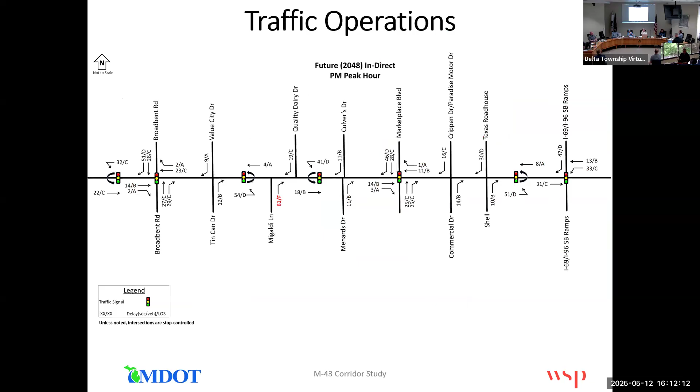Indirect, like an indirect, what does that mean? Indirect left and a J. Yeah, I'll show you here, I can pull up real quick, it'll help explain it and show it. It's a little tricky on the screen, as Peter mentioned earlier. Let's escape out of here and zoom in. Give me 1 sec.

So, Michigan left, yep, indirect left. Can you all see that pop? Is that, want to zoom in a little more on that? Yep, there we go. So commissioners, just remember you got the big screen behind you too. PowerPoint and these big long boards don't work well together.

Okay, so this is the Michigan left, indirect left, at Marketplace. If you're heading westbound on M43 and you want to make that left turn into Marketplace, with this indirect Michigan left option, you have to travel through the intersection, keep traveling westbound, and come to this first median crossover. At the median crossover, you make your left through the median crossover, come back eastbound to the intersection, and now you make your right turn onto Marketplace Boulevard - your indirect left. So no direct left turns would be allowed at the intersection.

You'll see a lot of these obviously in the Detroit area, Grand Rapids has quite a few of them. So you just have to go past the intersection, use the crossovers to come back to make that right turn into wherever you're heading. So Jason, while you have that drawing up, I assumed that description was going to be the J turn - what's the J turn?

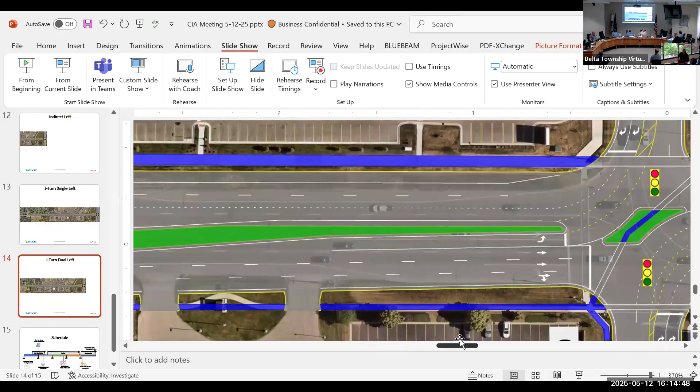Yeah, oh okay, so at the curve, the intersection is just two opposite J's. And it's two turning lanes? Well, going this left option he's showing you right now. Okay. Yeah, and we'll get in, we'll walk through the traffic operations, we'll show you why that needs to be that dual left turn lane.

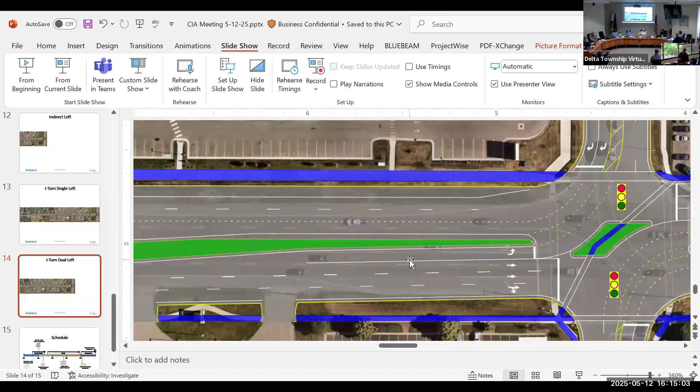And we talked about that 2A alternative and 2B alternative - that's the difference. The difference here is that Marketplace's original ops template had it shown as a single left turn lane. Then when we looked into the new development and new traffic projections, and then when we looked at that Saturday, we saw that if you keep this as a single left turn lane, you're going to have some significant delays and queues. During that Saturday peak, it's going to be difficult to get onto Marketplace with a single left turn.

And that's kind of, we went back and forth with the modeling and looking at all the queues and delays and all that. And that's why we came up with this alternative 2B, the dual left at Marketplace.

I understand, why is that? Basically you've added a median in the middle of the intersection, correct? That separates the opposite direction J-turns. How does that improve safety or flow versus just direct left turns?

So in this situation, correct me if I'm wrong, we eliminate some of the phasing at the traffic signal. You're getting rid of that through movement now too at Marketplace. They're all making that right hand turn now, so you don't need green time for the through movement. For a full access intersection, you have to have green time for your left turns, your through movements, and for each of the 4 legs. Under this situation, we eliminate that green time for the through movement.

So now that heavy westbound left has more time to clear all the traffic out through that. That gives more time for each leg of the pedestrian phase. With this indirect turn, especially at these intersections, pedestrians are using the intersection like it's a 4-way.

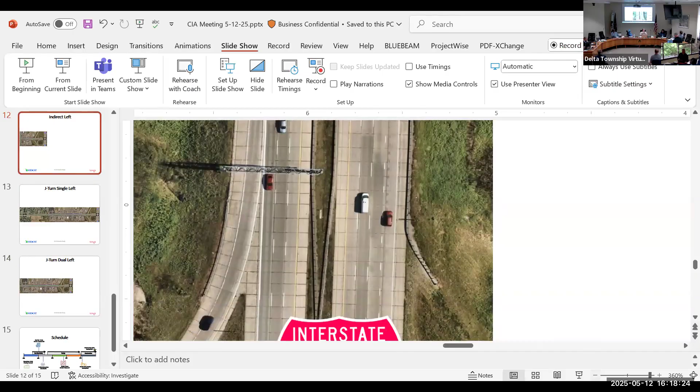I have a question about the indirect left. Because you're going past Marketplace and then you're coming around doing that sort of Michigan turn. But is there anything to stop the traffic from turning right before Marketplace? There was a side street there.

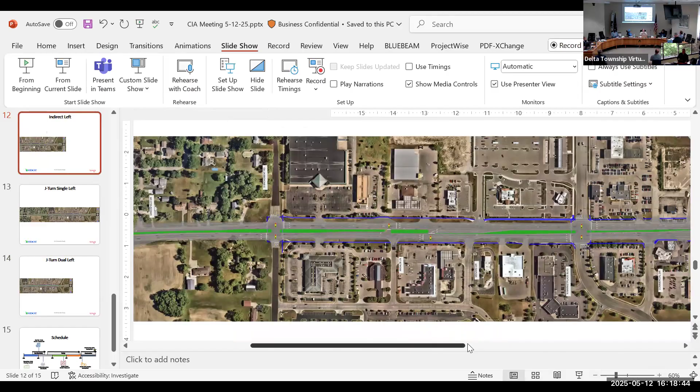They could turn there. Okay, so does that present any challenges by turning right - a lot of traffic turning onto that street before Marketplace? Yeah, I'm about to- Commercial Drive is the other one. You can turn right there too. Yeah, it looks like you can, but are there going to be any traffic buildups or jams as you get around in there into the main hub of that plaza?

Or will it, because that's on the private side. Right, yes. So as part of this modeling, we only looked at the traffic on 43. So as part of that, what you'll see is when we ran the modeling, when you're leaving this area eastbound, a lot of that traffic is heading to the ramps. You'll see this lane will get a lot of traffic in it because a lot of folks are coming out of the development heading eastbound to the ramps, and they're getting in this right turn lane because a lot of folks are coming this way down the ramps.

So I know the intention is you're making this Michigan turn and you're going to go to Marketplace, but it's like, why would I go all the way back to Marketplace when I could turn right 2 streets before? Yeah, and you'll see that.

And that's okay. We actually alleviate some of that - what you'll see is, obviously a lot of local traffic, eventually down the road, whatever, 5 years, maybe you'll see a little more balancing with the internal drives like you're talking about. So the local traffic will know, I can make it right here, I don't have to go to Marketplace. You will see some internal balancing, and again, local folks will go this way instead to avoid the traffic. You'll see some of that.

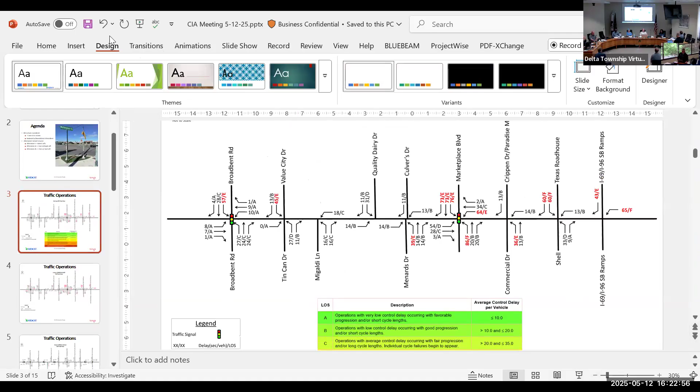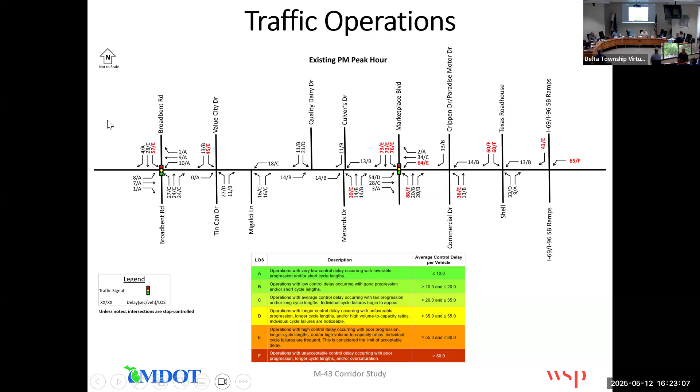All right, let me share this here. This is where I get confused. All right, can everyone see that? You want me to zoom in a little bit? Sounds like they need it zoomed in - zoom in a little bit on that. I'll have to go back to a copy here in front of me that may help. Oh, you can read it better back here.

Okay, so we just want to go over this real quick - kind of how we got to these traffic operations. As part of this study, we looked at the existing traffic conditions - that's the model we're showing here. We looked at the no-build conditions, which brings all this future traffic onto the existing network - what's going to happen to these existing intersections? That analysis helps us determine the future alternatives, where we need an additional right turn lane, two through lanes, whatever that may be. That helps us figure out the geometry.

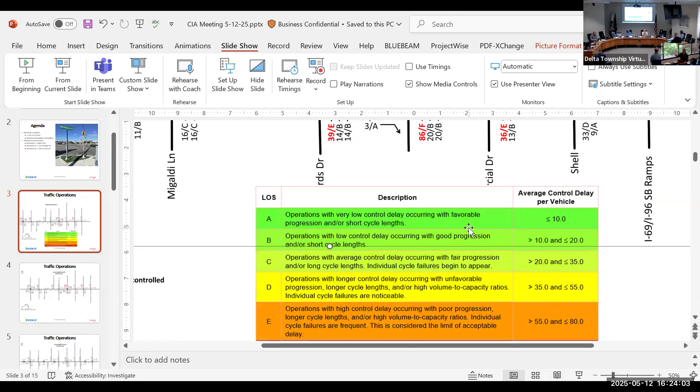I'll keep it at a higher level here - we can, if you want to ask questions, feel free, but really the focus is obviously the marketplace, that's where a lot of our traffic's going. So again, you can see here, this is the existing conditions - with today's traffic, this is what the traffic operations are. I know sometimes it gets a little confusing about these operations, so we have a little figure here showing the description of what this level of service E means.

As you can see here, anytime it's level of service E, we show it in red. It's long delays and long queues, you may have to sit through 2 signals sometimes. We don't want to see E's and F's typically.

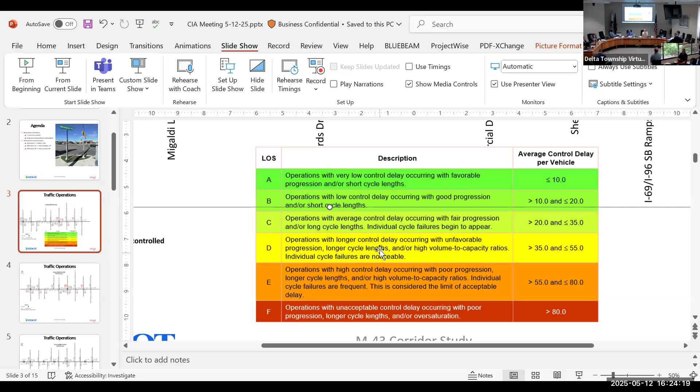So when we look at the existing conditions out here, we see that the westbound left is operating level of service E, with significant delays and long queues. And the southbound movement out of Marketplace is operating level of service E, with even longer delays and longer queues. I've been out here a few Saturdays where I've sat through 3 lights sometimes southbound at Marketplace.

So what we found, we've all tried this as well, we live in the area, is that this existing conditions model probably does a pretty good job actually predicting what's happening out there today. So we trust the model, believe in it, it shows real world experience. Yeah, here's what we're experiencing when we're out here. Does anybody have any questions on the existing conditions model?

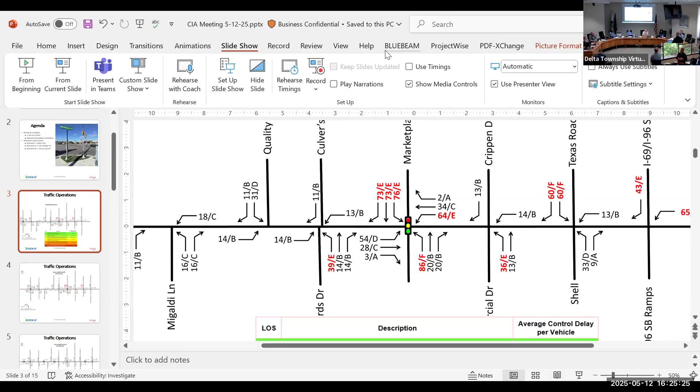So what we found is when we're looking at the overall traffic, typically for any MDOT project, any local agency project, you design for your AM and PM weekday peak hour. So that's the approach we took first. The PM weekday peak hour was the controlling peak hour in this situation, there was more traffic entering during the PM peak than there was the AM. So we took that scenario and used that for the basis of our modeling to see what's going on in the project area. Then when we talk about it a little later, the next step was to look at those Saturday conditions, and we'll show those 2 in a sec.

Based on that, now this is the no-build scenario, 2048. So these are our 20-year traffic projections. It shows 20 years of growth, but it also included all the proposed developments, the Bass Pro, the senior citizen home, the medical center to the west. So it included all those developments. We throw all this new traffic onto the existing road network, and we press play on the model and see what happens.

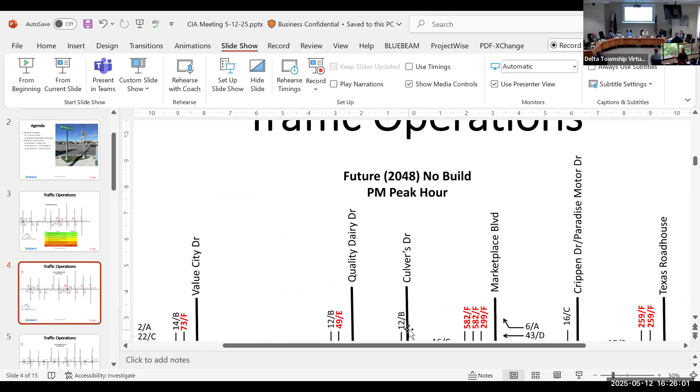So based on that, obviously, we all know what's going to happen, right? We add all this new traffic, we don't make any road improvements. And this optimizes the signal timing, so we can play with future signal timing to make some things work, some things not work. But what you can really see here is that southbound Marketplace gets significantly worse, 582 seconds of delay. So you're sitting there for 5-6 cycles. It's a long delay, long queues. You're able to keep the westbound left turn relatively reasonable, level of service E still.

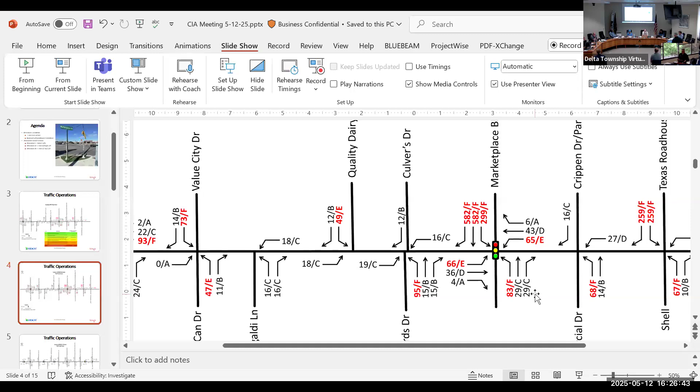You can, again, tweak the signal timings, allowing that westbound left more green time. And then what you'll see here now, though, is that the eastbound left turn on Marketplace fails, poor E level of service. And then the northbound left also goes to level of service F, which is to be expected. You're adding this traffic, everything fails in this situation.

So the next part of the study was, well, what do we need to do to improve these traffic operations to provide acceptable levels of service? So that was where we came up with the alternatives. Alternative 1, the indirect lefts. Alternative 2, the J turns.

So when we model those new alternatives onto the road network, what do you have here? This is the indirect alternative. So you can see at Marketplace by adding this new alternative, what we're doing here is we're taking out the left turns out of the intersection. So now there's no green time needed for left turns, so we can provide more green time to the through movement and the westbound movement. Because now the left turn's got to go through the intersection and come back in that indirect Michigan left. You can see under that scenario, this indirect alternative provides some pretty good traffic operations all around.

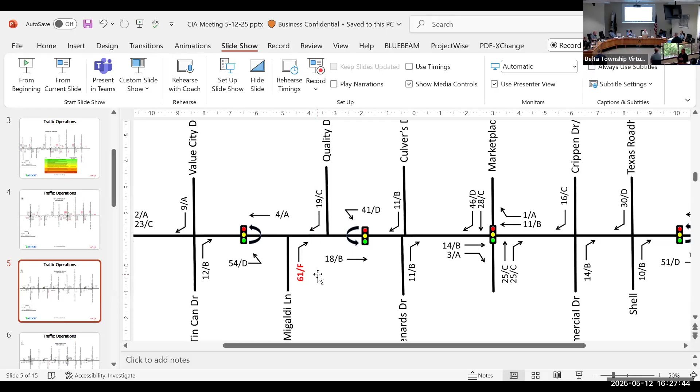We've only got one level of service D for the Marketplace southbound right. So we ran that alternative, it works great, provides acceptable level of service. It provides pedestrian refuge. So those are the kind of benefits of that alternative.

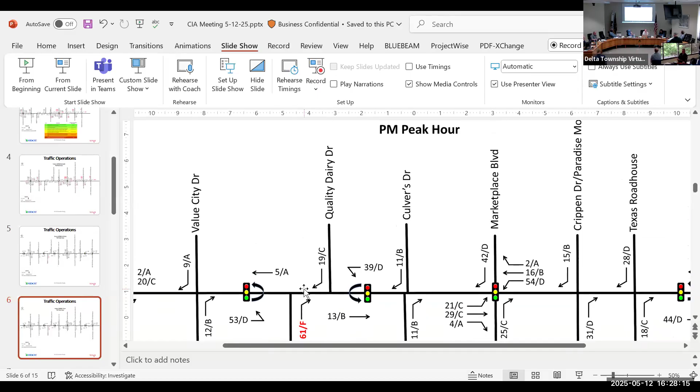So the next step was to look at the J-turn alternative. This is what we'll talk about a little, the single lane and the dual lane. So when we take a look at the same traffic volumes, the 2048 future volumes, and we lay down the J-turn alternative - we showed earlier that this allows direct lefts, westbound and eastbound, but there's no north and south through movement. You can see here the J-turn also provides pretty good levels of service, acceptable traffic volumes, minimal delays, minimal queues.

In your survey or when you prepared these projections, did you include additional businesses, or housing? So anything that was on an approved plan was included. We can't predict housing in some situations - we don't know everything that's going to happen.

At some point, what you'll find is we have these 20-year projections and a lot of times we'll include this wide net of everything. And in 10 years, the economy changes, things change, and then we don't reach those. So we really only typically take what's planned for, what's accounted for.

So what they have is each, like Bass Pro, developed a traffic impact study that goes to the township, that goes to MDOT for review. They approve those traffic volumes, and we plug those into our model.

I'll ask this of Peter - isn't housing proposed in the development already? Yeah, one of the phases. I worked with the Delta Crossings team to update their traffic study that encompasses everything they are aware of now - that could be subject to change, but it was kind of max build out. So that's the information the consultant team is working off of. Everything the township has in the books now, or that we're aware of that's planned, has been incorporated.

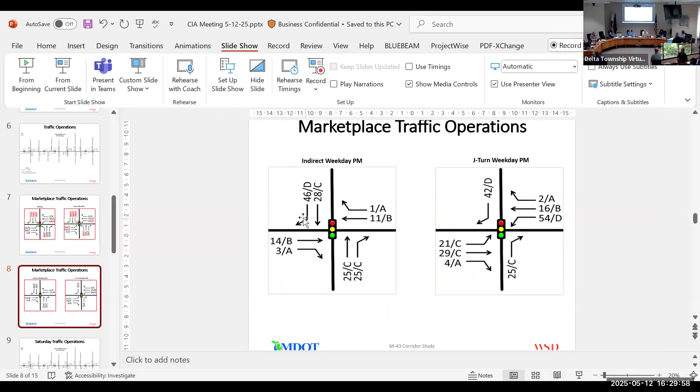Here's just a quick comparison of the alternatives during the PM peak. Again, it just shows that they both work well at Marketplace - they're both providing acceptable level of service.

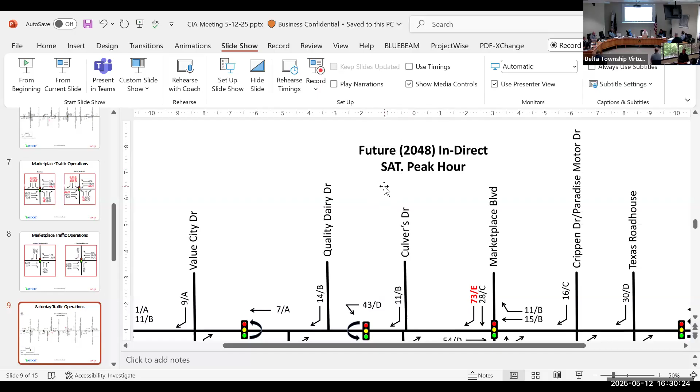What we found is Saturday volumes vary - they're different than our weekday PM peak. Obviously you get more folks coming in and out to drive through the corridor, eat at the restaurants, go shopping. So when we ran the Saturday peak hours, 2048 future volumes, this is the Michigan left alternative.

What's really critical in this one is this crossover here - it fails during the Saturday peak. You see that through movement at the crossovers, 79 seconds delay, level of service E. So again, long delays and queuing, sitting there for a couple of 2 or 3 cycle lengths.

So then we also ran the J turn option under the Saturday conditions, and you can see here, this is the single left turn. Under that J turn alternative, the single left at Marketplace, you can see that westbound left fails during the Saturday peak, the southbound movement fails, and also that eastbound through movement fails.

So when we ran those 2 scenarios, we said, look, maybe we have to look at some different lane configurations. That's where we took a look at the dual left turn lane under the J turn option. You can see now, by having this dual left, we can spread the green time around the whole intersection, so now the eastbound movement provides excellent level of service.

You got C's, B's, and A's. This westbound left now operates at a level of service D instead of that E. So by adding that second dual left, it significantly increased the capacity, accommodated more traffic volumes at Marketplace. Instead of 3 throughs and a single left, now it would be 2 throughs and a double left - so you're not adding crossing pavement for pedestrians, you're just changing the usage of one lane from a through to a left.

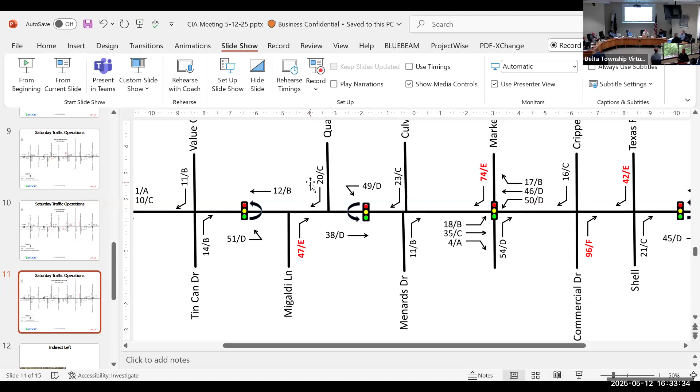Obviously the main benefit of the boulevards is, if you recall, the purpose and need statement from last month: improve safety on the corridor. That's not only pedestrian safety but also vehicle safety. Currently there's a lot of direct lefts in and out of driveways, and that's where a lot of these crashes occur. So you put the boulevard in, you eliminate the direct or the left turns, and you reduce those crashes significantly.

With the proposed changes, are we keeping the same level of speed for the vehicles? Yes, it'll be the same.

This is an MDOT gold route, so the lane width has to accommodate semi vehicles. The lane width has to stay at 12 feet—correct me if I'm wrong. It's going to stay at 11 feet, sorry. And the speed limit will stay posted as is, correct?

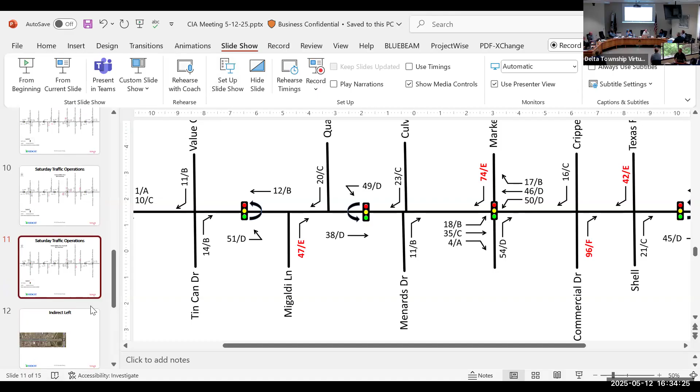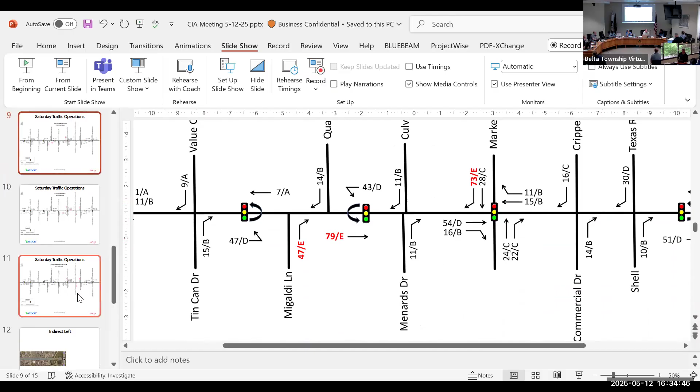Sorry for being anal, but I'm just trying to make sure I understand this correctly. On the three options here, future 2048, indirect, Saturday hours—just to pick arbitrarily, Commercial Drive—looks like you'd expect a 14-second wait, or B rating, to turn right out of there towards the highway, right? Correct. But when we add the J-turn, that time actually goes up—it increases to 34 seconds. And when we add the double lanes, it goes up now to an F, future, to 96. I'm just trying to understand how those positive changes negatively affect the results.

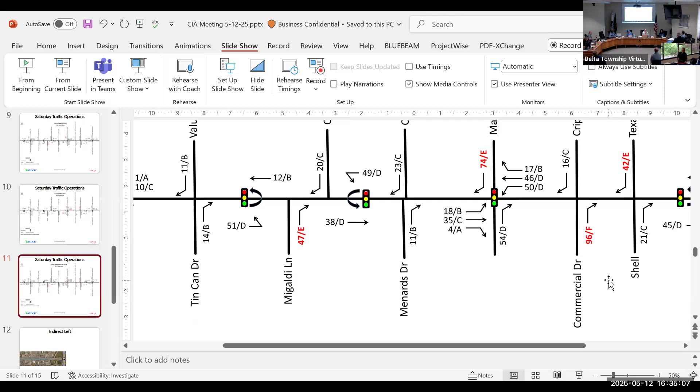Yeah, I'd have to look at the modeling more. I'm guessing what's probably going on is since this is an unsignalized drive—Aaron, you can help me out if you have thoughts too—you're probably putting a lot more through traffic in front of that driveway. What's happening is we've got to accommodate that left turn heading southbound. So if you only have one lane, you have to give more time to that left. The same operation that happens right now is you have a protected left, and you can also make that northbound right turn movement. When you go to two lanes, it's more efficient to move the lefts, so you actually have less of a window if you're on Commercial Drive to turn north, where you kind of have that protected left shielding you from the eastbound traffic.

So that's kind of why it gets a little bit harder—it's just because there's more green time on Saginaw, so you have a little bit less of a window to make that right. That being said, we've talked about traffic balancing, and I would think that more people would move over to Marketplace if you don't have that protected movement.

Okay, thank you. Yeah, so you can see all these, they all have trade-offs, they all have impacts—it's like we talked about the purpose and need. We do one thing, it doesn't necessarily address this part of the purpose and need, but it moves more traffic. So there's a lot of trade-offs, a lot of back and forth on these alternatives, and it's a bit of a challenge. There's a lot of traffic in this corridor, that's for sure.

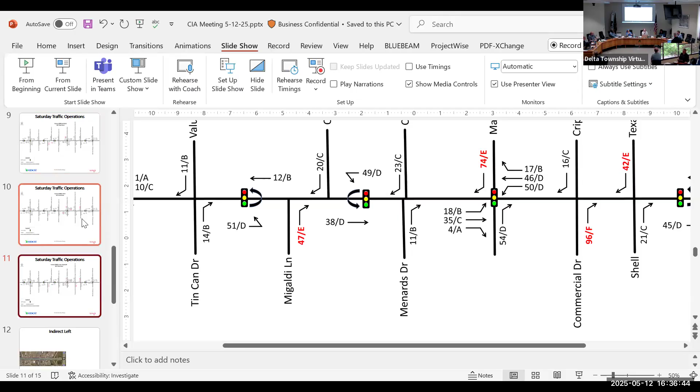I can walk through the alternatives real quick. You guys want to walk through them up here? You want to go in the back? Is there one more question?

I was just wondering about the medians, what you're calling medians—is that raised, or what is it? Yep, so those would be raised medians, something you would see. Where's our closest raised median out here? By the mall, maybe—yeah, by the mall, a short one there. So yeah, like 5, 8 inches or lower, those are 6 inch, 4 inch curbs—or 4 to 6 inch curbs, so there'll be a curb this way. How wide?

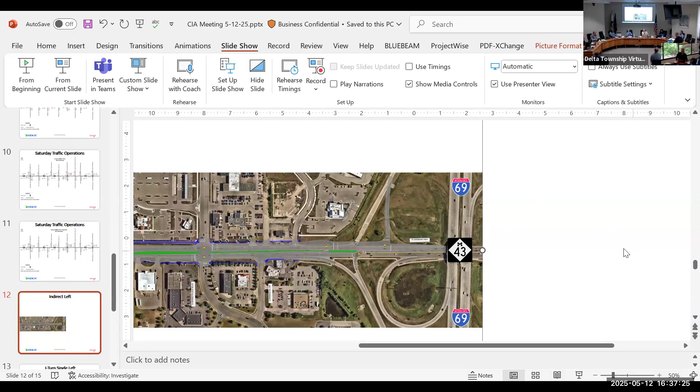Depends on the alternative, but I think it narrows up to 3 foot. That's where you got the dual left. But through here, you're about 20 foot.

And then the J-turn median strip, how wide would that be? Again, that depends on the alternative for the dual left. About 24 foot, I would say, north and south, and about 16 foot wide.

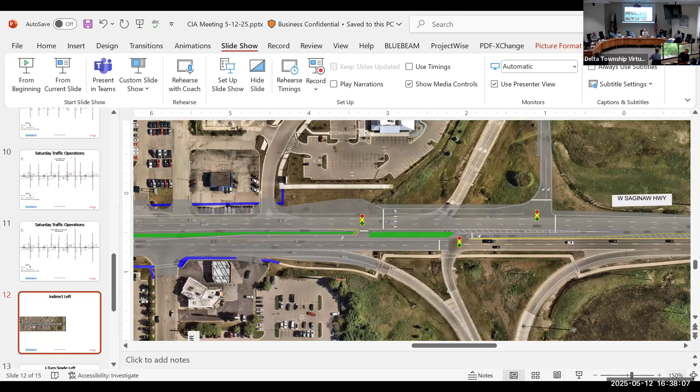The median is shown as green in these, that doesn't mean it's all going to be grass. We haven't discussed what it's actually going to be in detail. It would be really hard to get a mower in there in a lot of the spots. We might have to turn them all into rain gardens to deal with the stormwater runoff in this area, so who knows. But that detail doesn't necessarily affect the design choice between the J-turn and the medians, whether it's one of these indirects or the J-turn.

One thing you'll notice on these alternatives are these little bump-outs, called loons. To accommodate a semi truck with these narrow medians, the semi will come through and make its crossover movement, and it will need to use this bump-out traffic loon to make that U-turn movement. That's why you'll see that bump-out there. We have a couple other bump-outs too, we'll point those out as well.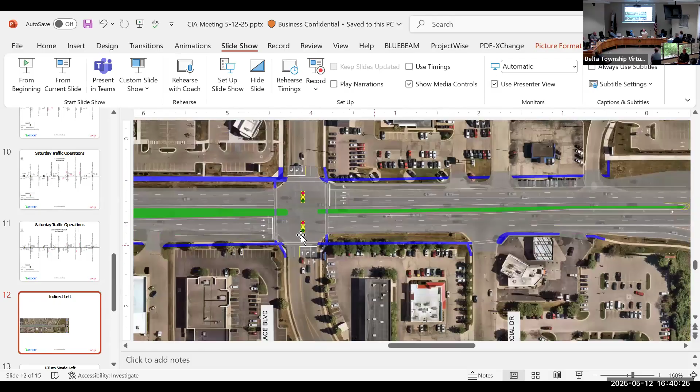We walked through that indirect movement a little while ago, talking about coming through, then back around to the crossover. And you can see here, due to the high level of traffic volumes, you'll need a southbound dual right and a northbound dual right to accommodate all the traffic in and out of the Marketplace intersection.

And Jason, what's the blue on these? Those are sidewalks, we want to make sure those popped out so everybody can see them. They would be replaced in kind. And for the southbound traffic on Marketplace, is it one turn right lane, or is there one straight and two turn lanes? Yep. Seems a little wonky. I'll get it back, there you go. So it'll be southbound dual right and a single through movement.

As you said, that last crossover we showed you was to the east of Marketplace. This is the western crossover. You can see there's no bump-out, the traffic lane's much smaller, because there are some significant right-of-way concerns here. So this crossover would not accommodate semis coming out of Marketplace. When we get to Broadbent we'll show you where the trucks would need to go. In this situation, trucks would need to pass this crossover, go through Broadbent, and there's a crossover west of Broadbent.

They would have to go to that crossover, make their U-turn movement there, and head back east through the project area along the corridor. So there would be too much right-of-way impact to make a full-size loon in this location.

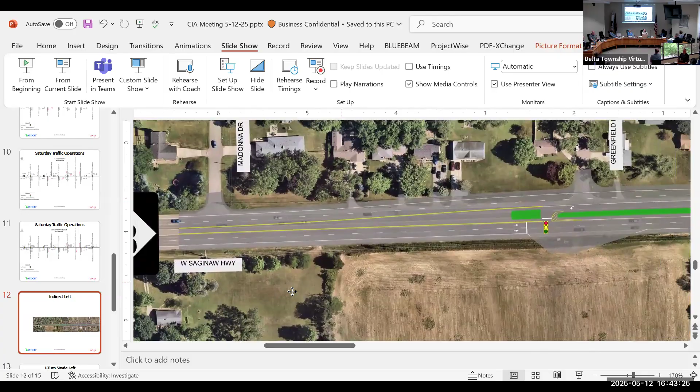Correct. So in your opinion, simple pros and cons to the indirect left as opposed to the J-turn. The biggest difference between the indirect left and the J-turn at Marketplace at Broadbent is that the indirect left turn is going to allow through movements. The J-turn prevents those.

Keep in mind too, we need to move traffic here, and when we look at that Saturday peak, the J-turn does a better job of accommodating Saturday traffic volume. So that's kind of the big trade-off between those two alternatives.

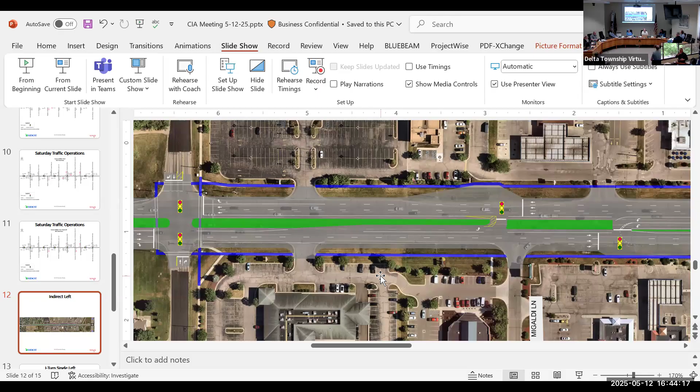Is the J-turn also, because of what you described earlier, slightly better for people with special needs getting across, so they could do it in two stages instead of one, using the median? So I can show you, at Marketplace here, a pedestrian could cross southbound and use the island, same thing as that one, just in a different location. They would still have the opportunity to cross one bound of traffic at a time.

I'm sure lots of people do it, but the majority of people are going to one destination, coming to go to Lowe's, or Menards, or BJ's, not necessarily going to all of them at the same time, but we're kind of prioritizing getting them into the development and back. There's other ways for them to go around, and they know the area because a lot of times that's going to be their goal, they know that they can go.

And during the public meeting that you're going to have, will they be presented with all of the options, or are you expecting us to narrow it down? That's a good question. We've talked internally, and the plan now is to present the indirect option, alternative 1, and then alternative 2B, the dual left turn J-turn.

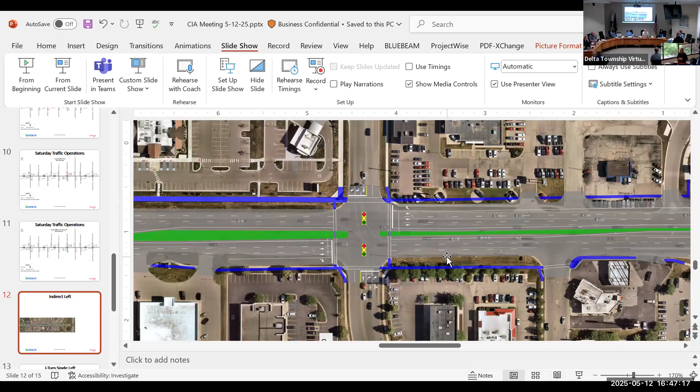So I'll skip right to the J-turn alternative. Everything to the west is pretty much the same. The ramp is being relocated slightly to the east, same location, the eastern crossover, same setup, same alignment. One thing to point out during this traffic analysis: this originally was a double left crossover. We had some concerns with that, pointed out by our team members. We went back and re-looked at this crossover and determined that a single left could accommodate it, so we reduced the laneage there.

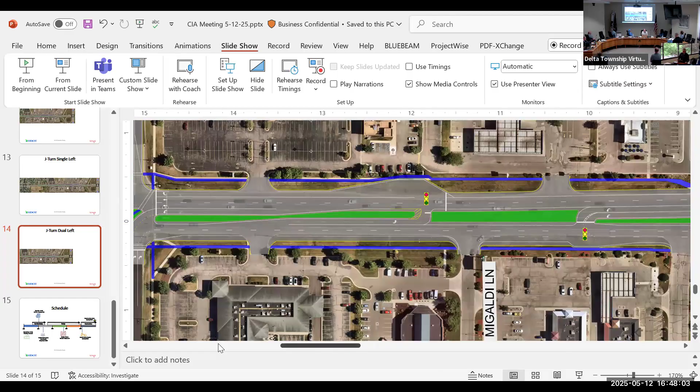So here's the J-turn alternative at Marketplace. Oh excuse me, going the wrong way.

So as we talked about earlier, we originally looked at this as three through lanes and a single left turn lane. Again, based on Saturday volumes, we took this lane and converted it from a through lane to a left turn lane to make this a dual left onto Marketplace. As we showed you earlier, the traffic operation worked much better with this dual lane alternative, and that's why we're going to present that to the public instead of showing both the single lane and dual lane, just to avoid confusion and make it simpler to present.

Just for clarification, is this very similar to what we have down by Goodyear and the Lansing Mall, as far as turning, having two lanes that turn in the same direction? Is that a dual left there? On Elmwood? Yeah, right here. Yeah, it'll be similar, very similar to that. So you'll see dual lefts around quite often.

The pavement marking is important to keep folks in their lane, but when you're making a dual left, people are usually pretty aware of what's going on around them. If there's a semi making a dual left, most people aren't making the dual left at the same time - they'll rush ahead or pull ahead and let that truck go by itself. So you'll see these double lefts throughout the state.

And just right out here, right out our window. Yep, so this required a double right southbound Marketplace as well, and then a dual right, double right, northbound Marketplace, to accommodate those Saturday peak hours. And we talked about the pedestrians crossing here - they could cross westbound, wait for their green time, then cross eastbound as well.

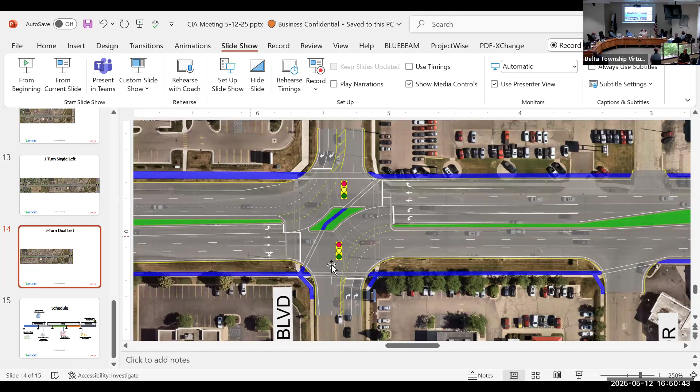The bottom lane right by your cursor, is that both straight through and turn right? No, this is just a right only - no wait, I mean up above on the main road, right here? Yeah, so what we found in the traffic modeling is when this was a right only - I think it was originally a right only - a lot of folks start getting into that lane knowing they have to get on the ramp southbound. Based on traffic analysis with the project team, we figured we should make that a through-right instead of right only, to help move traffic along better through the corridor.

And then we have the same J-turn option at Broadbent. And then, just to point out, we talked about that eastern crossover at Marketplace. You'll see the western crossover here needs a dual left turn, because there's a huge left turn volume making that movement.

What happens is when you close, especially on the indirect left option, when you close Commercial Drive, a lot of folks were making lefts on Commercial Drive. Now they have to make a left at Marketplace, but there's no direct left, so they have to come to this crossover. So you need a dual lane crossover at this location, just for that huge left that wants to go southbound to Marketplace.

And then here's the J-turn option at Broadbent. So again, this does not allow through movements through the intersection. Nice.

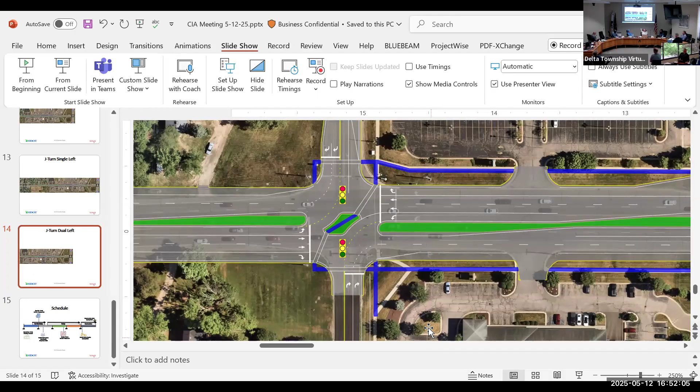Just for clarity, Jason, to the board. If there's a semi up on the north side going to BJ's, and he wants to deliver to the south, he can't use the indirect left immediately west of Marketplace. He has to go past Broadbent, or turn left at Broadbent and come in the other way. That's a good point, Doug.

Yeah, so under all alternatives, trucks cannot use this crossover. They have to go all the way west of Broadbent. I just want to point out, there's no benefit to either one for that truck. He still has to go further down. So it's common to all of them, which is good.

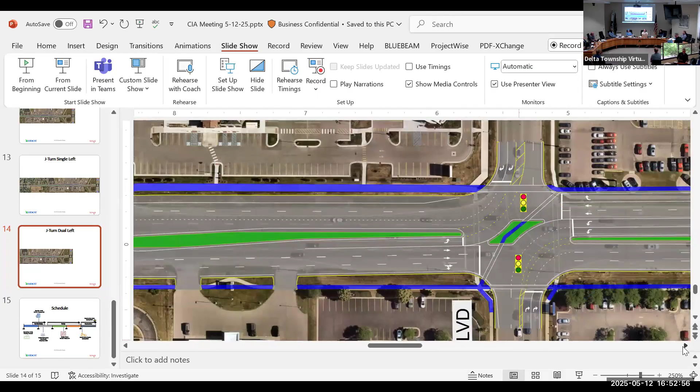Again, what you're gonna see, the biggest difference is that through movement. With any of these adjustments, as far as the side streets, like Marketplace, the driveways, are there gonna be any adjustments to driveways?

For example, at Marketplace, coming off of Consumers right now it gets really crazy. If you come out of Consumers wanting to get all the way over to make that left, it doesn't look like the chute is long enough to line the cars up properly. So would you need to block off that driveway and have them drive out the back to create more room for the cars to line up? Yeah, I've tried to make that movement a few times.

I know what you're talking about, but right now we're only focused on M43. We really haven't looked at access management options internally. That's something the Township would need to look into separately.

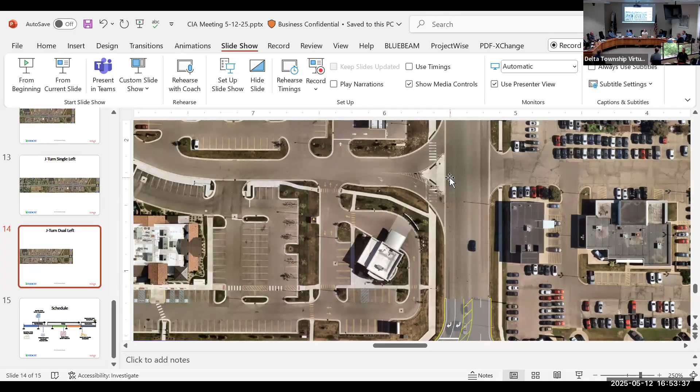So there's no way we can fix right there at coming out of Cracker Barrel? That's a tough one too. Yeah, that's probably likely to come up in public comment when you present this. Right, that's what you're trying to do, see what kind of momentum there is for that concern.

I think it's a legitimate concern, for sure. 100%. Access management is always a challenge, obviously, and most business folks don't want a driveway closed or relocated. So it's always a tough challenge when you start talking about access management.

Yeah, driver patterns will change after a big project like this, so sometimes it's best just to wait and see what they actually end up doing until we make any major decisions, like with the side streets and stuff.

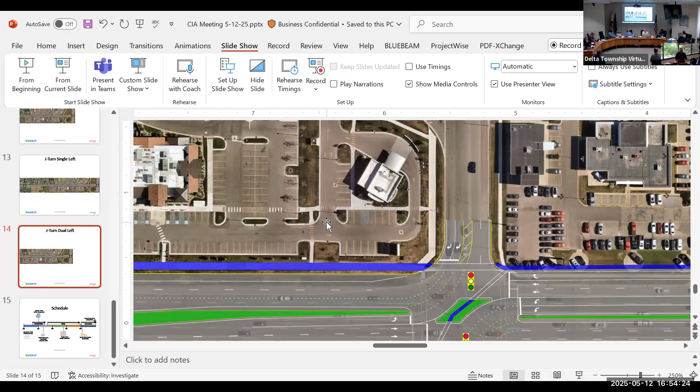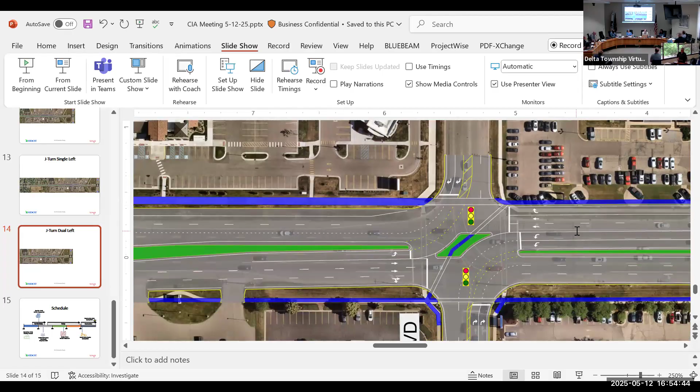It's fascinating to me that the indirect turns, for the aforementioned reasons, are favorable to the straight through traffic on West Saginaw between Menards and Marketplace versus the J-turns. I just think it's interesting.

Yeah, it's just a function of that signal timing there, allowing more traffic, fewer gaps, and you can see the knock-on effect it has throughout the corridor.

Anybody else have any specific questions? Want to look at a specific location or traffic operation questions? Again, we have all the displays laid out here that show a little more detail on an aerial. Feel free to take a marker or pencil and mark them up.

You guys want to go look at those? I do, in a bigger picture, to see them. All right, thanks. What are you talking about?

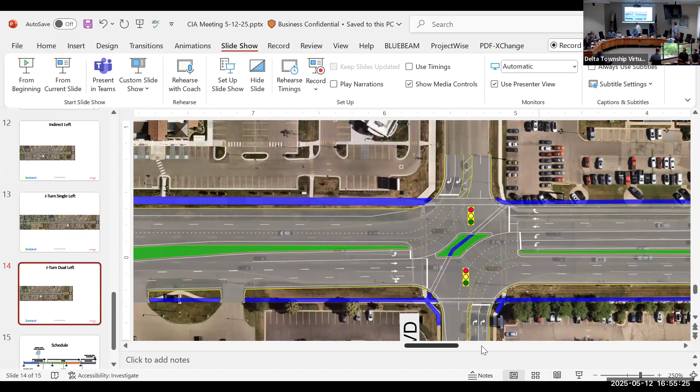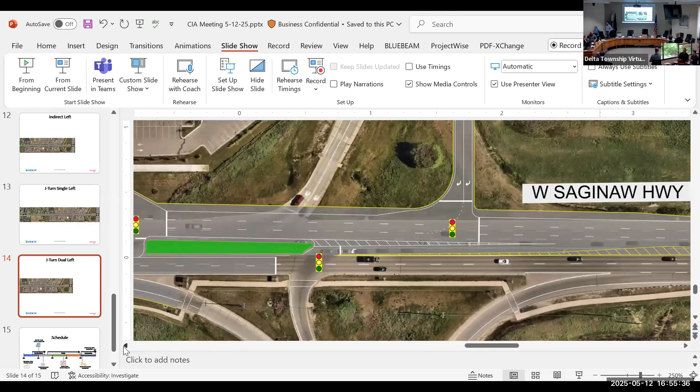Good to know. Well, that's what I think they're talking about, people find their own way, but it's still good to try and consider it. See, this is weird.

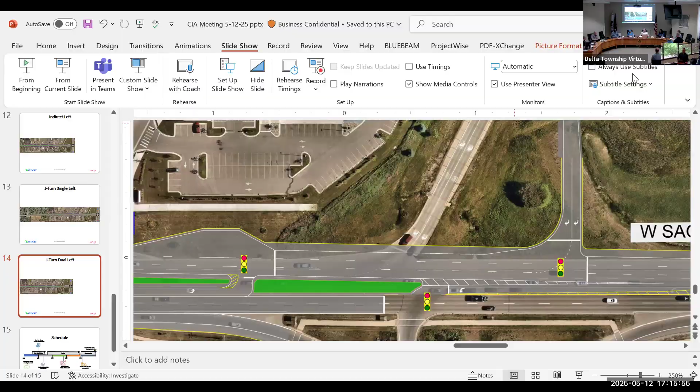Okay, I know we tabled it, if we're ready to move on, the election of officers update, but I'm not sure what the discussion was since I wasn't here. This is more of a follow-up, so I just wanted to, since it was on, we're again not doing election of officers today.

At the next township board meeting, we're gonna have, we the collective, gonna have Donald Lavelle - if you haven't met him, he's here. He's one of the candidates to serve on the CIA board. He has an IT business on the corridor, Troubleshooters LLC, down in the office building on the north side, just past Elmwood. And then there's Keith Wright, who you've seen here at a couple meetings. He works with Consumers Credit Union down the way in front of Delta Crossings, up for consideration. And then Bill, who's already here, would be considered for reappointment. That'll be on the 19th, the board's meeting next week.

Nice, at least that's what we're expecting, action on that. And then from there, at the next meeting of the CIA board, I think you could have a robust election of officers with everybody being considered.

Sounds good. Any comments? Just a reminder, the ascendancy model for the CIA advises that the current vice chair, Scott, would ascend to the chair. The current secretary would ascend to vice chair, that's Rachel, and then we'd have the open secretary position. So there would be one open officer position.